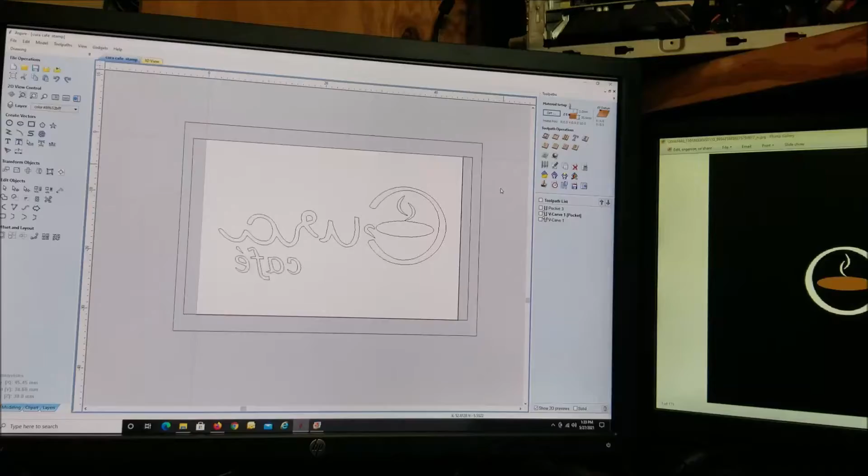My wife wants me to make this stamp for her pottery business. So I'm going to take you guys along for the ride, show the setup and everything.

So here we've just basically got our vector lines. So this is the stamp. And I have to reverse it, so when she turns it over and stamps it into the clay, it creates this.

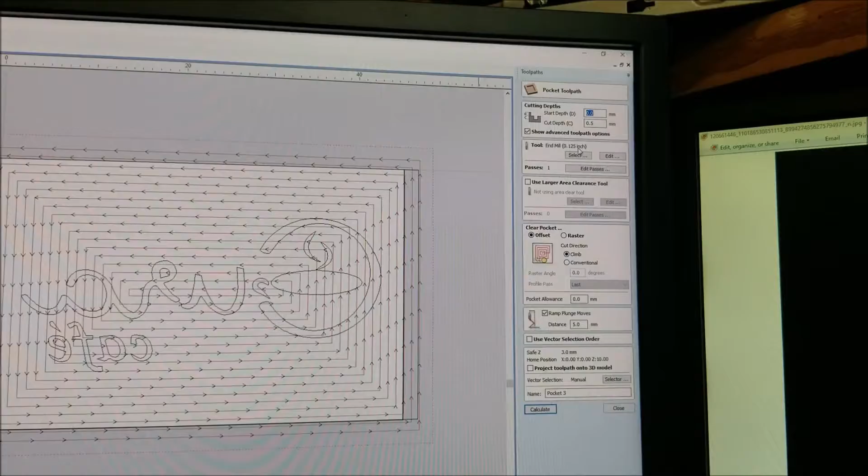So here's what I've got. I've got my material set up to the size of my block, and I've got 3 tool paths over here. First tool path is nothing more than a surfacing, a pocket tool path, and if you see, I've got it going outside of my material boundaries. So that's just going to deck off the surface. I'm using a 1/8 inch end mill, starting at Z0, the top of the material, and it's going to cut 1/2 millimeter down and surface this.

Now if we look at the V-Carve tool path, let's go ahead and turn this off. Here I'm using 2 end mills. I'm using a flat 1/8 inch end mill, the same one as before, to go through and cut out most of this material I don't need. And then I am using a 15-degree tapered end mill with a 0.1 millimeter ball on the end, and that is going to come in and do all of the rest of the stuff here.

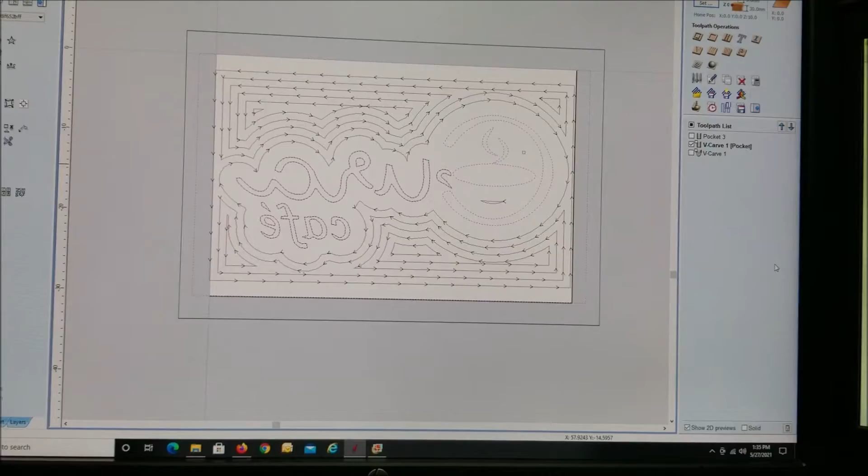So that's what the ball end mill is going to do. Now all of this out here is just wasted time because there's no material, but that's just the way the software creates the tool path, so we have to let it do it.

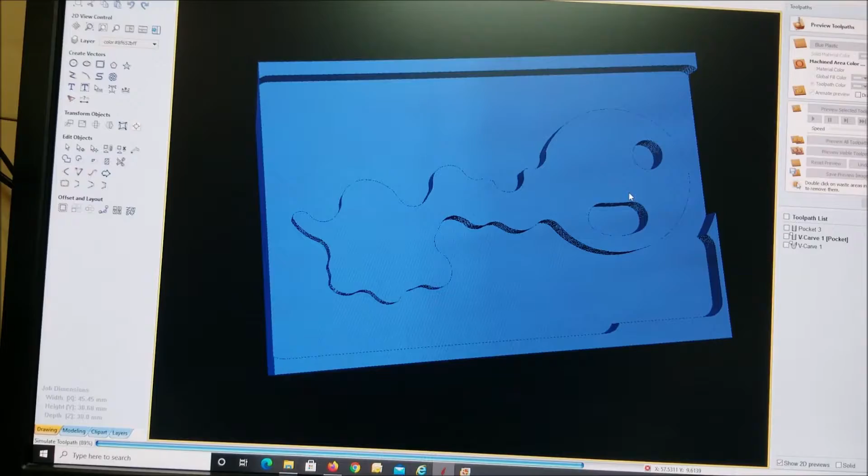And if we go in and we do a simulate all tool paths, there you can see it decking off the 1/2 millimeter on the top surface. Now it's going to come in and remove most of the unwanted material for the V-Carve. And there's the V-Carve, and that's what we should end up with.

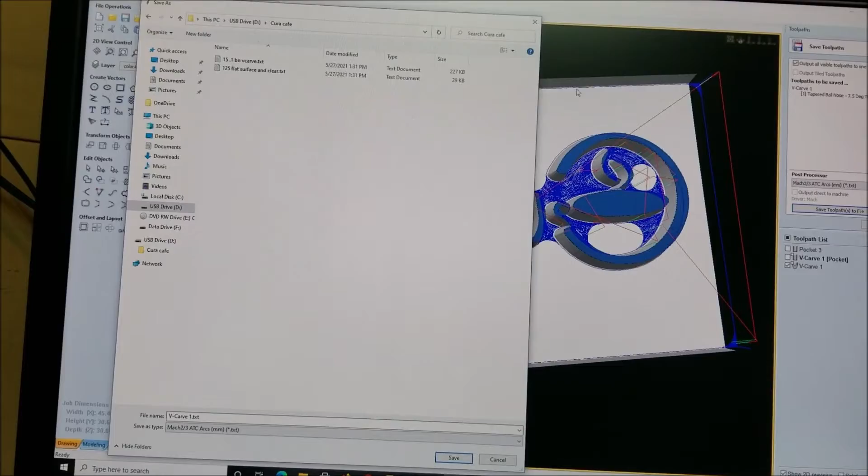So I've already created all my tool paths. Now I just need to copy them over to a memory stick, and the way I do it, since I've already saved these, save to file, and it brings up all the stamps I've done. This is the Cura cafe one. I am going to copy this folder over to my memory stick. And then I'm going to come in here, and here's my 2 tool paths. I saved the decking and the roughing of the V-Carve, since it's using the same tool, into 1 tool path.

So now we're going to grab our stick and head over to the machine.

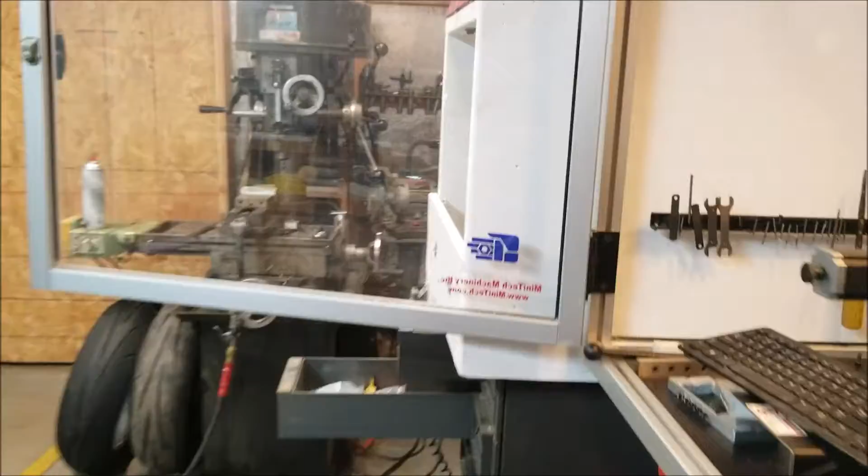So here we are sitting at the machine. I've just thrown my vise up. I've got a ground parallel in the jaws. I've got an indicator. This is one little modification I did to the machine that is worth its weight in gold. It's just a round piece about 2 inches in diameter, hole drilled through the middle, and I drilled and tapped the hole into the squeeze clamp for the spindle, just so this spud stays on here at all times. And then I can just take a regular indicator holder for Bridgeports, you can get them off of Amazon for 10 bucks. And then I've got my indicator down here.

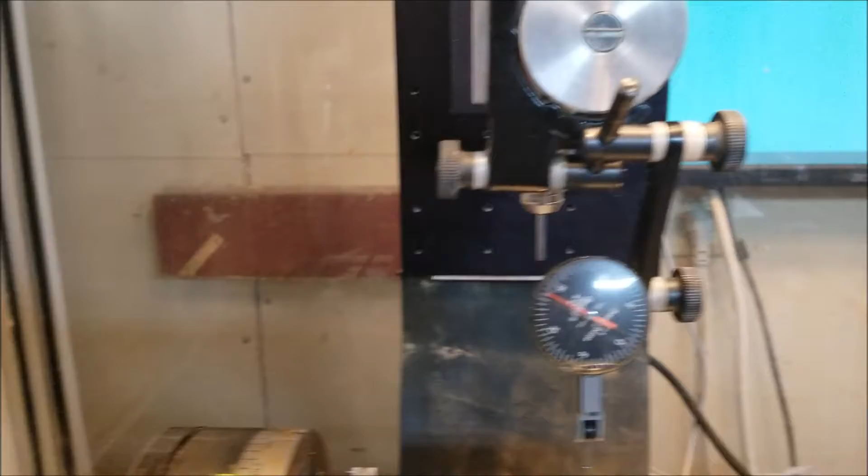So I need to fire up Mach. Reset. Very first thing we always do is home all.

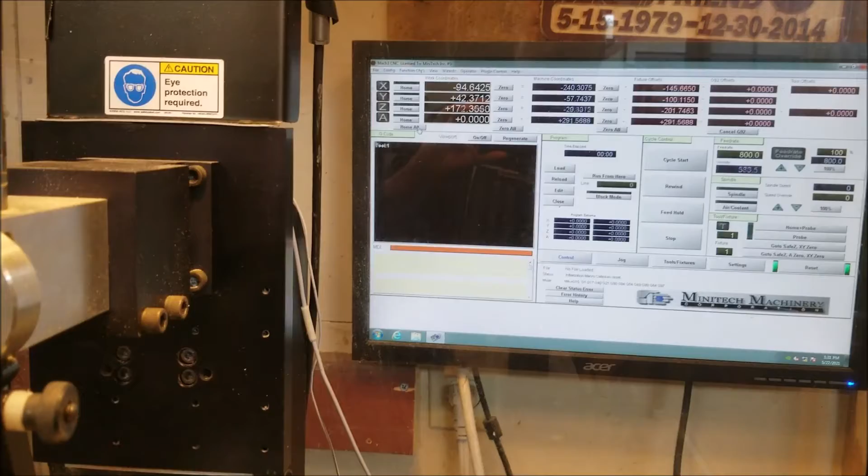And I'm holding my phone while I'm doing this, so it's going to be quite interesting. I might just have to explain some stuff when I go to set up my zeros.

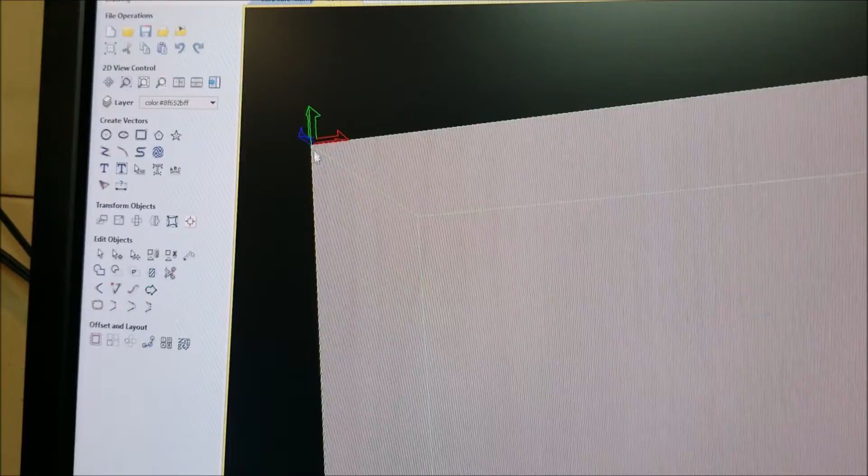So I did not mention, if we go into the setup, we can see that my 0 point, or my datum point, is the top left corner, or the back left corner, top of the material for Z. So it all happens right there. If I go in and I turn off my tool paths, you can see that my 0 points are right there at the top of the material.

Alright, so we are homed. Now we have to indicate the vise in just to make sure that it's straight. As you can see now, it flops all over the place.

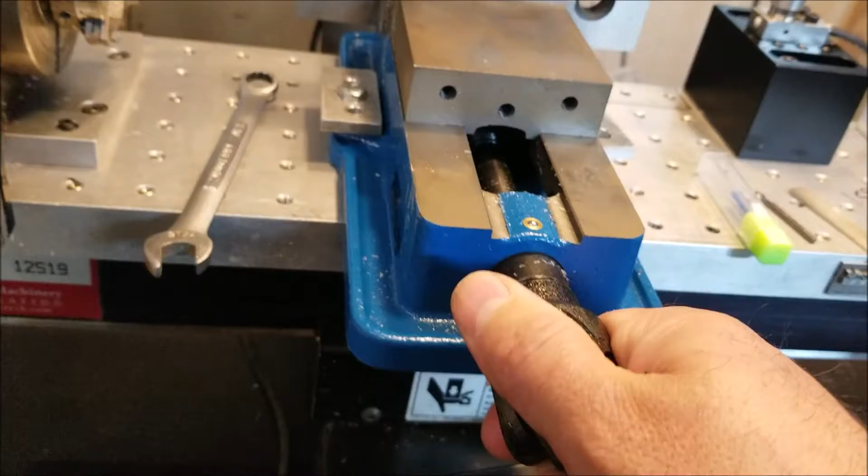So I just want the ball to be somewhat snug. Okay, it is. So I'm going to take it, touch the ball on here, and run it back and forth, tapping on this to get it straight. Since it's really loose, I'm going to tighten down this one side just to get it snug and create a pivot point.

And we're going to come over here, put a little bit of pressure on the ball. So we see that when it rotates clockwise, it means the needle's coming towards us. So we kind of need to know that.

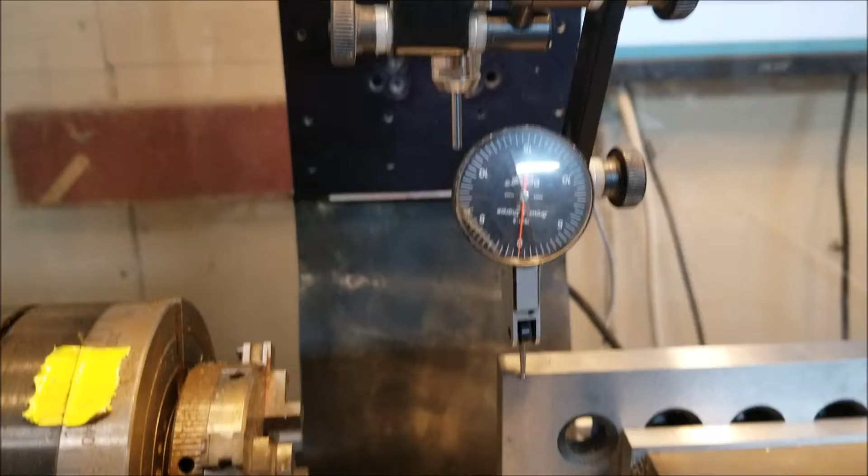And just for fun, I will somewhat zero that. Now I'm just going to jog across. So if it goes clockwise, that means this side of the material is coming towards us. If it goes counterclockwise, it's going away from us. So there we're going counterclockwise.

Over here I have a magnetic strip with all the frequently used tooling, and I've got an old screwdriver. Just tap on that - so we can see it's still going away from us, so we need to tap the other direction.

And get it close to zero. Let's go back and see how far that moved us over on this side. The reason why I'm using the parallel in here is I've only got 3-inch jaws, so I'm clamping something that's longer in the jaws for more surface area, so I get a better indication. That's all I'm doing there with that.

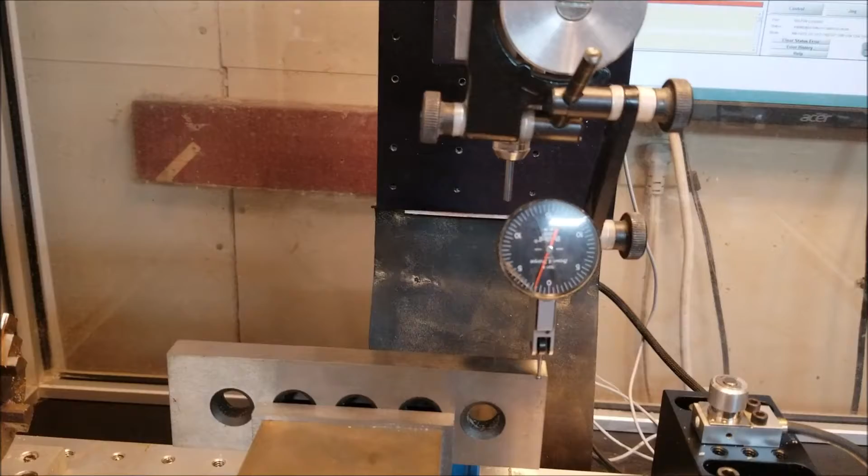So this is a half-thousandths indicator, and that is telling us I'm 1.5 thou off. So we can see that the needle's still going in the same direction, so I'm going the wrong way. So we'll start tapping on the other side.

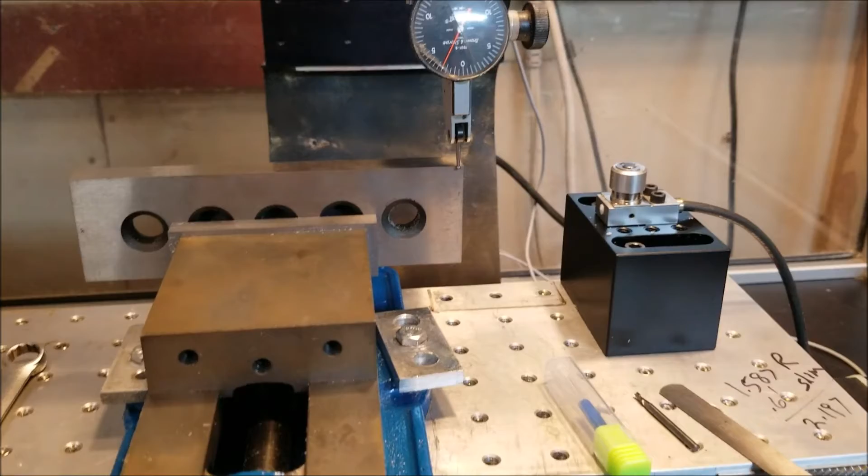And get it right there. Jog back over. For the part I'm doing, this isn't very critical, but it's always good to get in practice. So there's a half thou, and then it goes back towards zero. So I am going to leave that alone.

I'm going to find my wrench, going to snug that down. And without touching anything else, we're going to sweep back across. Still within half a thou. I ran off the edge, no big deal. Indicating is done.

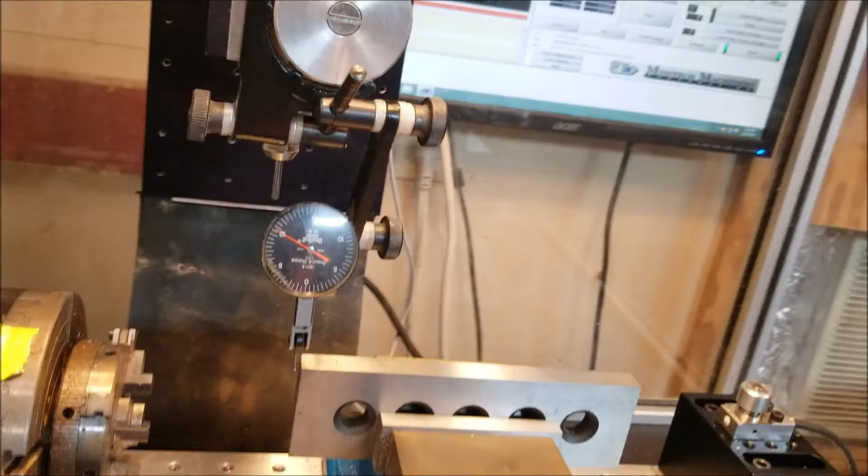We can take this off, and I just put it up here on top of my enclosure. All right, so we are done with that parallel.

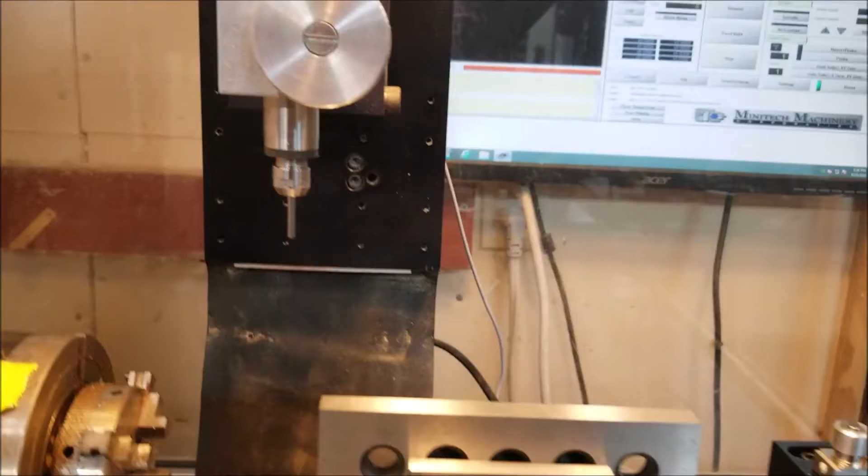So we'll take it out. Now the fun stuff happens. So I have to find that edge right there. So I can either take a tapered tool, and for this job it probably would be perfect, put that in the spindle, bring it over here and line it up right over that corner, 0, 0, and I'm good.

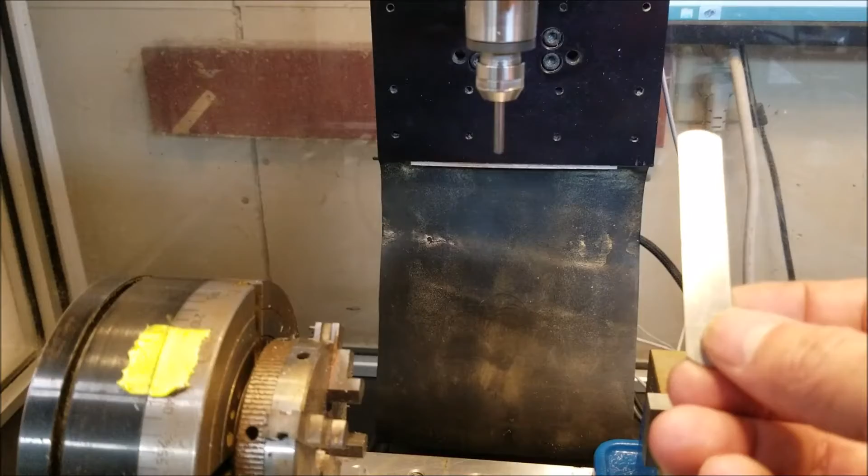But I'm going to do something a little bit more tedious, but a little better as far as tolerances and stuff goes. So I have a round 1/8 blank in the spindle, and I have a 0.61 millimeter thick feeler gauge. What I'm going to do is I'm going to do it off camera because I need two hands and I'm holding the camera phone. So I am going to put this in here, and I am going to jog this till it just touches this, to where when I can slide this, it'll actually rotate the spindle.

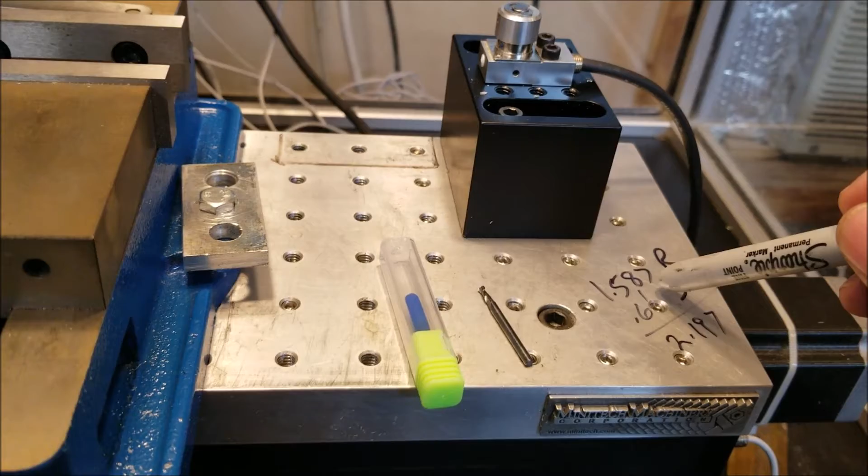What that will tell me is I am the radius, or half of the diameter of this, plus this off of that line. And I always, since I'm terrible with numbers, do the math that I need to do, and I'll take a Sharpie marker and write my numbers down here that I know I need to work with. So 1.587 is the radius of that tool. I'm going to be off that, and add those together. When I come over here and touch it and zero there, I know that I am 2.197 millimeters off of the edge, because I want this edge to be on the center line of this tool.

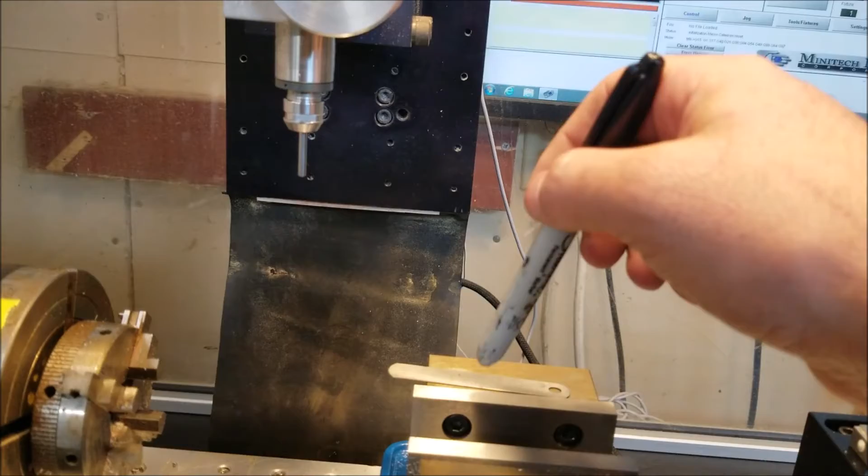So I will touch off there and touch off there with this in there, make some little minor adjustments, re-zero, then I will put my material in, put my tool in, bring it down, touch the top, and set my fixture offset. We will get to that here in a second, but I am going to beat on this for a second, and I'll be right back with you.

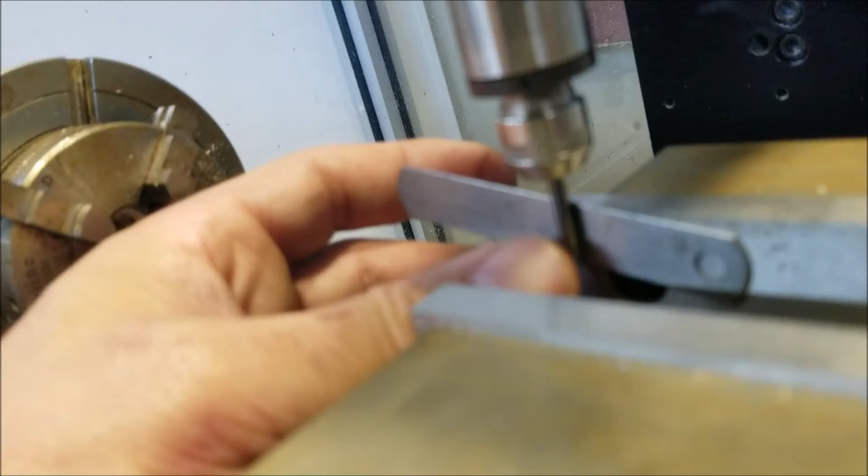Alright, so here's what I've done. You can see I've got the feeler gauge in there, and when I pull it, it slides and rotates the tool, which means I've just got very little pressure on there. So if I want this edge, which is my 0 point, I need it in the center line of this tool. So I will just zero out the y-axis, jog it straight up - and I'm in step mode, so let me go back to continuous - jog it straight up.

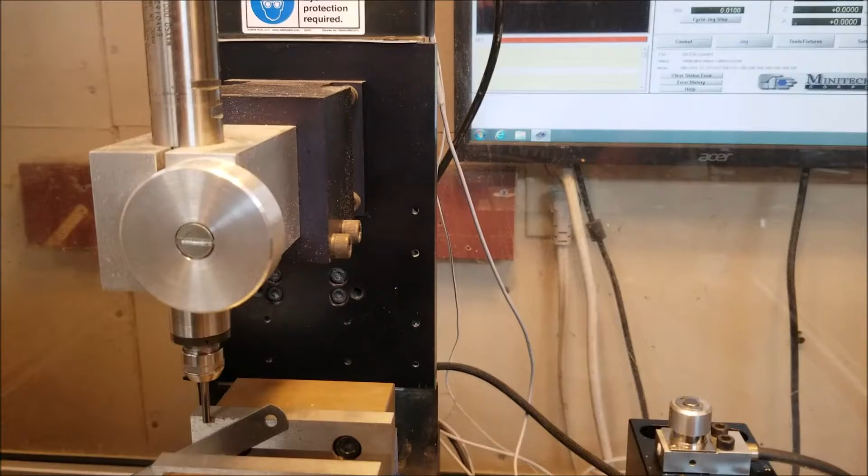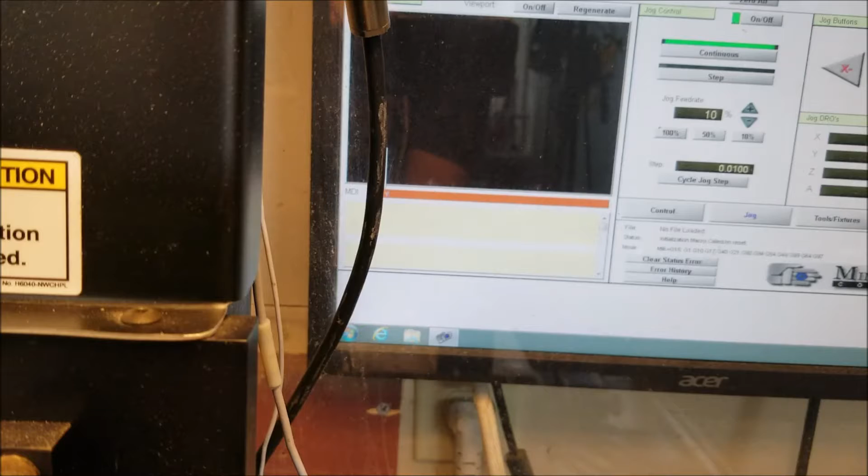And if you don't know the positive and the negative and so on and so forth, we can come up here and we can push or jog the direction I want the spindle to go. I want the spindle to go to the back, so I'm going to press the up arrow button. I'm going to watch. So that gave me a positive number there, so I can now open up the MDI line and tell it to G0, Y, and I look over on my table where I wrote the numbers down.

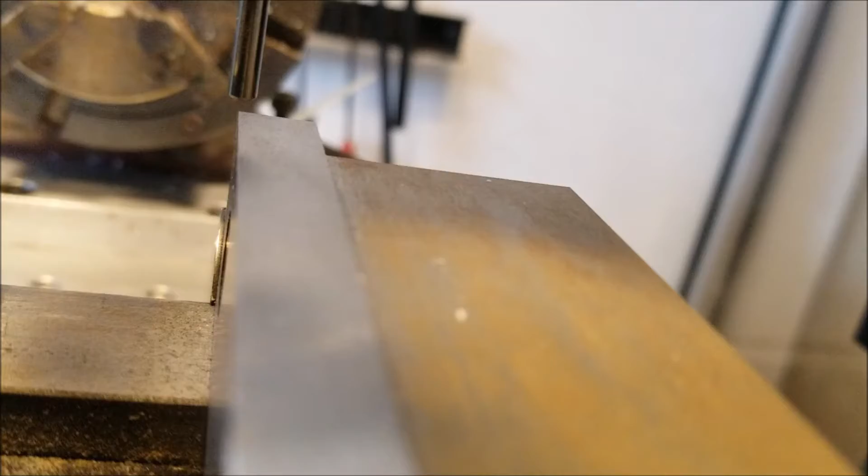So we need 2.197. So you can see I've got the code typed in there. Do a really quick check to make sure that when it moves, nothing crashes. Press enter. So now if we look, and you gotta get the perspective just right, I understand that, I am now centered over that edge. So now I will come up here and I will re-zero Y.

And I am going to do the exact same, except this time I am going to come off of this edge right here. Then when I put my material in, what I will do is I will put a straight edge across there and butt my material up against that. So let me get working on that. Hopefully this video isn't long and boring.

So here I am on the X. We can see that I'm rotating this. I don't have to put a lot of pressure, but it's rotating the spindle. And now if we look really close, we can see that gap that it's left in there. So this is X. So I am going to zero X. Jog Z-axis. I'm still in step, but if I hold the shift button down, it'll override it, there we go. So now we need to know, is that a positive or a negative direction?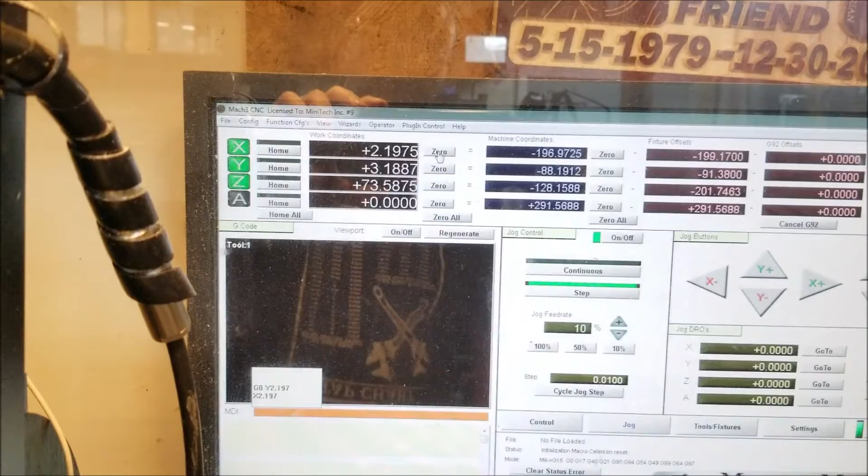So now if I tell it to G0, X0, Y0, I am now perfectly centered over that corner. So now we have to do the Z, but I have to load material in first so I can get that. So what I'm going to do is I'm going to put the camera down, I'm going to raise this up, I'm going to put my cutting tool in here, and I'm going to put my material in.

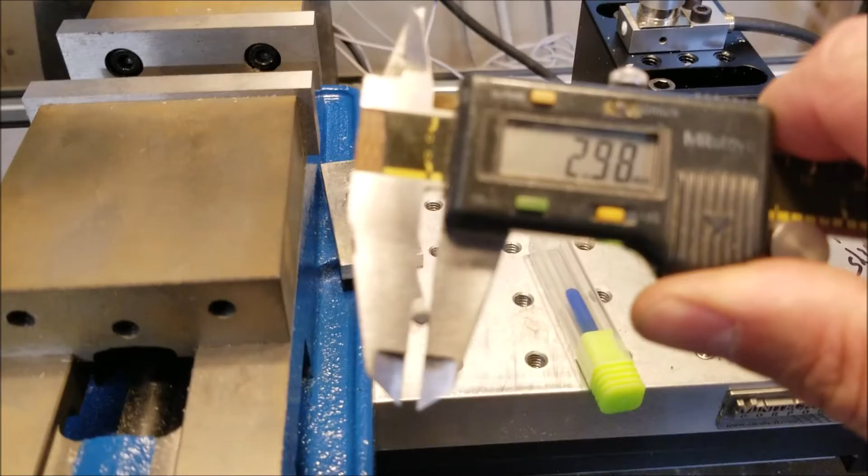Something I just ran into, I think it's worth mentioning. So there's the broken tool that was in there that I just used as the bar. Okay, and here's the end mill that I grabbed. Pretty close. But if I stick this up in my collet, very loose. Whereas if I stick this up in my collet, I can feel the drag from the fingers. So I grabbed my calipers, and just bear with me while I do this. That's a 3mm tool. And you're probably going, yeah, so? Well, my other one was 1/8 inch, which is 3.175mm.

So could I probably get away with sticking this tool in a 3.175mm collet, tightening it down? Yes, but you run the risk of doing what we refer to as springing the collet. It means you're compressing it too far. So I have one of two options. I either grab a collet that would fit this shank, and then I have to go and rewrite my tool path because it was written for a 3.175mm flat end mill, or we put this back over here on the bar and we grab us a right size tool. So now when I stick that in there, it goes in there really tight. Let me get that finished. I just thought it was worth mentioning.

One other thing worth mentioning is I got this up here in the collet, and I tightened it all the way down, and then I thought about this, so I thought I'd show it. It's hard to do one-handed, but I've got the collet nut loose. Or I thought I did.

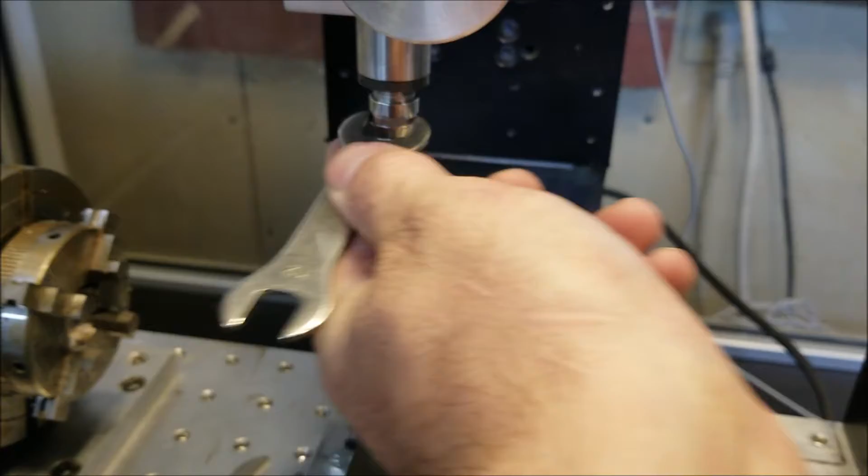Hold on one second. See if I can bring this down so you might even see what I'm doing.

So the way this works, and this is mainly for new people, a lot of people know this, but you can see that the nut's loose. I tightened it up, nice firm pressure, then I broke it loose. I can spin it, but the tool will not, well, yeah, I can pull it out, but it's hard to pull it out and push it back in. So on these collets, you spin that nut till it stops spinning again, then you have to put the wrench on it and pop it loose.

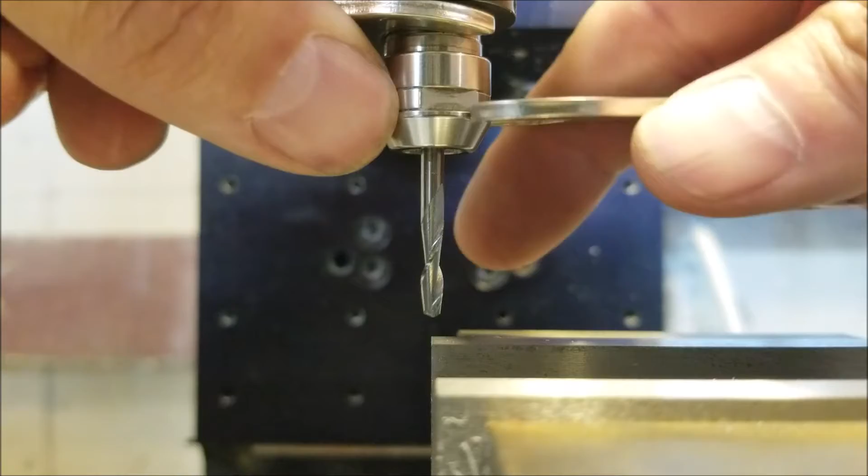One of these days I'll actually get some kind of equipment to do this. So what I was trying to get to is when you tighten one up, and then you break it loose, and then you unscrew it till it tightens back up, you still can't pull the tool out. So you have to put the wrenches back on it, pop it loose again to get it to pull the collet out of the actual taper of the spindle. All right, so there we have that. And let me go ahead and jog the Z-axis up.

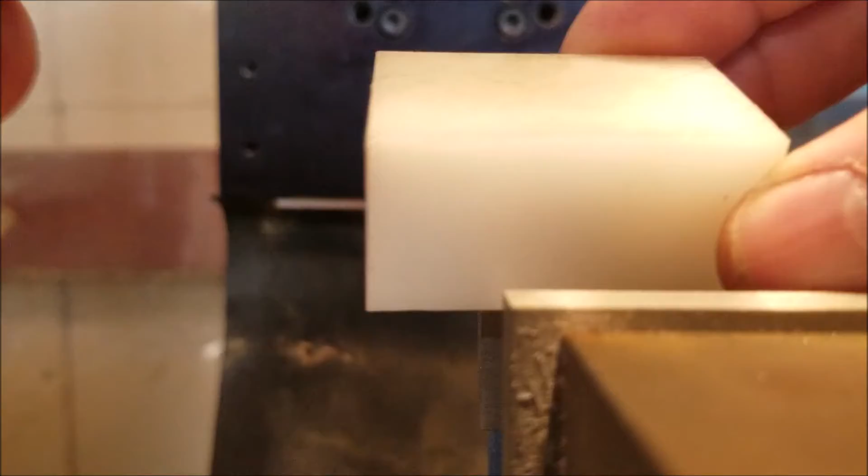So here's the piece of material that I'm going to use for this project. It is saw cut on almost every side, so it's not square by any means. But I also can't just chunk it in my vise and go to town on it, because it sits lower than my vise jaws. So I can't machine off this top surface without running into my vise jaws. So that's where parallels come in. And I don't really have any for this vise, but I've got some big ones.

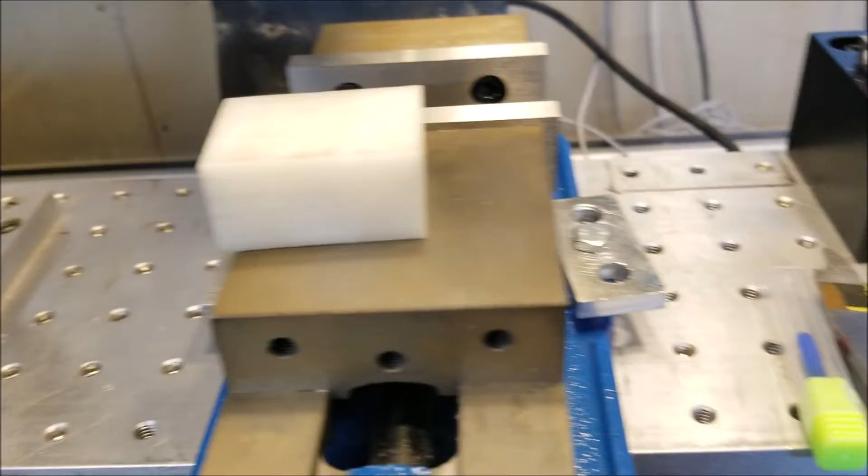And what I like to do is take this guy, run your hand around all the surfaces down here, make sure there's no dirt, dust, swarf, chips. And I am going to lay this guy down. Then I'm going to put this guy right on top of that. Now I'm going to take this guy, run it across these two surfaces, because that's the one I indicated on. I'm going to push it over, down, and I'm going to stop the camera, grab my vise handle, and crank that knob.

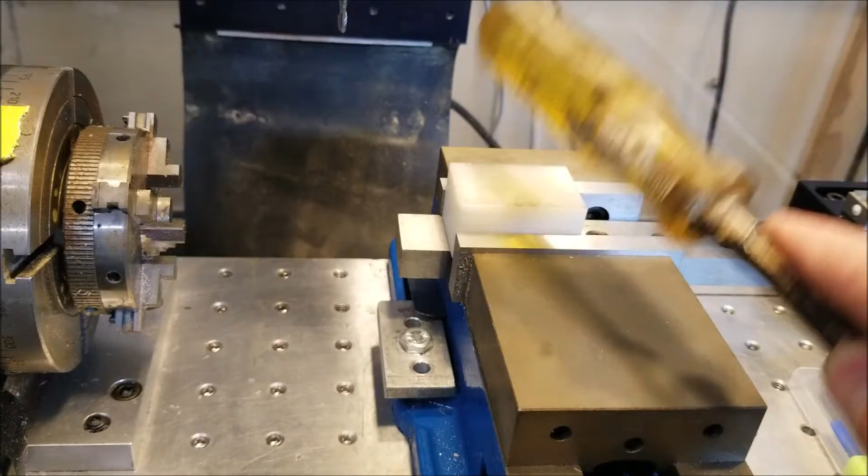Now, because my material is saw cut and it's not square, things lift and move, and it's not going to be a problem for this part. But for example, if we look right down, you can see where it bows up off of the parallel, but my parallel's in here tight. I can wiggle it and probably get it to pull out, but what we'll do is let's jog this out of the way. My trusty hammer. As Adam Savage says, anything's a hammer. Tap it down tight, and we're there.

And that will work. So now we have to find the top surface. And I'm sure it's wavy and not square either. But what I'm going to do is hit about the middle. And we are going to take our... technical difficulties. I lost my shim. Be right back. Couldn't find my shim because when I did that, it fell down over here. So we know that this shim is 0.61 millimeters thick. So if I stick that on there,

and it went away from me too much. Get about the center, and I'm gonna go cycle jog step to 0.1 millimeters. We're gonna step down. What I'm looking for is drag on that. So I saw it move. That's actually pretty damn close.

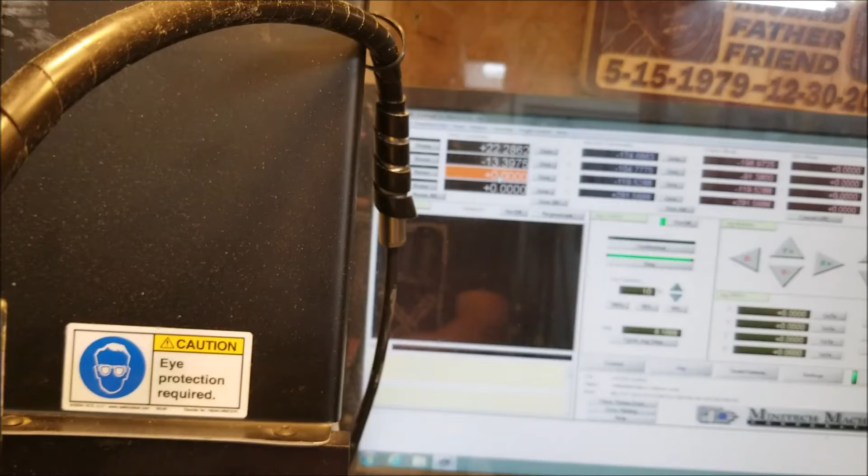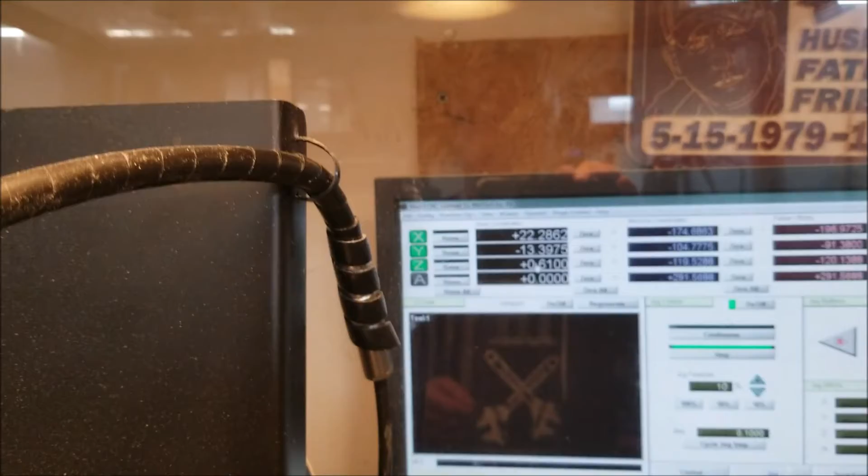So knowing that, if this is touching the top surface, and this is a known thickness, and this is touching this, then we can do it one of two ways. We can come up here, zero Z, take the shim out, tell Z to go negative 0.61 millimeters, and then re-zero Z again. Or we can just come up here and tell it that it is at a positive number because it's off the top surface, 0.61, which was the thickness of our shim. We told it it's now 0.61 millimeters above the top surface.

Now I need to set a fixture offset, so I'm going to tell it G0 X0 Y0 in the MDI line. So now we're over that corner. Now I'm going to tell it G0 Z0.

So we are 0, 0, 0. Tool is sitting over the edge, over that corner. Material's not straight, so it's not exactly perfect, but for this it's going to be fine. So if this is our work coordinates 0, 0, 0, I need to set this as a fixture so I can refine the tool length using the tool probe.

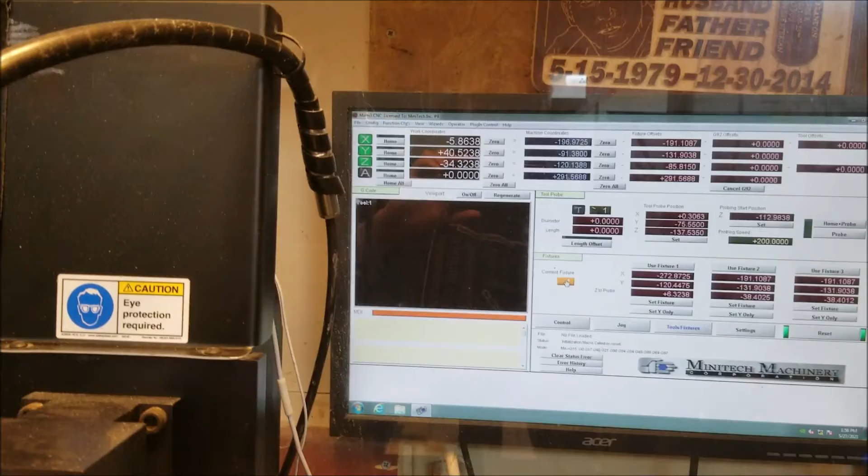So we're going to go to Tools and Fixtures, and I am going to use Fixture 2. Now when I told it that I was going to use Fixture 2 right here, all my numbers changed because it was originally using Fixture 1. So if I come over here to Fixture 2 and I just zero all, I'm back to where I started. Now I'm going to set fixture. It's going to need a probe.

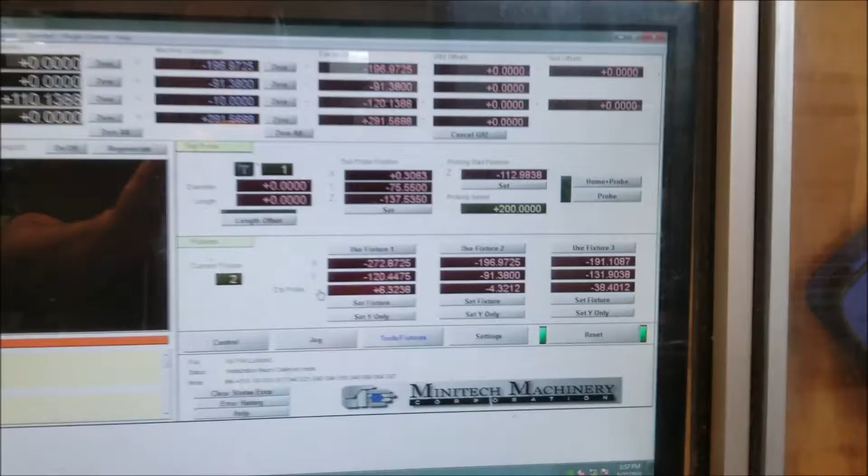This is pretty boring, so I'm just going to go ahead and pause. Okay, it's done probing and it set my fixture, which is these numbers here. We've got our first tool in, so now we need G-code. Slap this down here into my dusty computer.

Cura Cafe, cut, come over here, load G-code. I've got a folder in here. So the way I do it is right off the C drive I create a G-code folder. Then I put subfolders in there for the projects that I'm doing. So here's Chris's stamps. I'm just going to right click anywhere, paste that. Show all files. We don't need this.

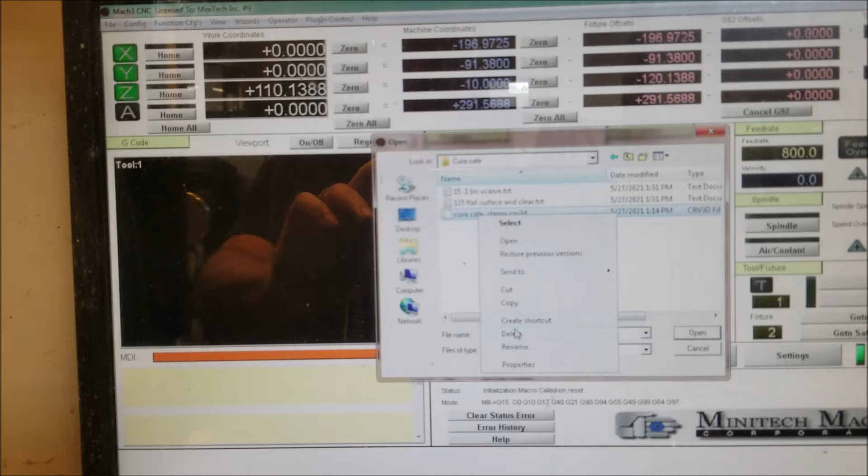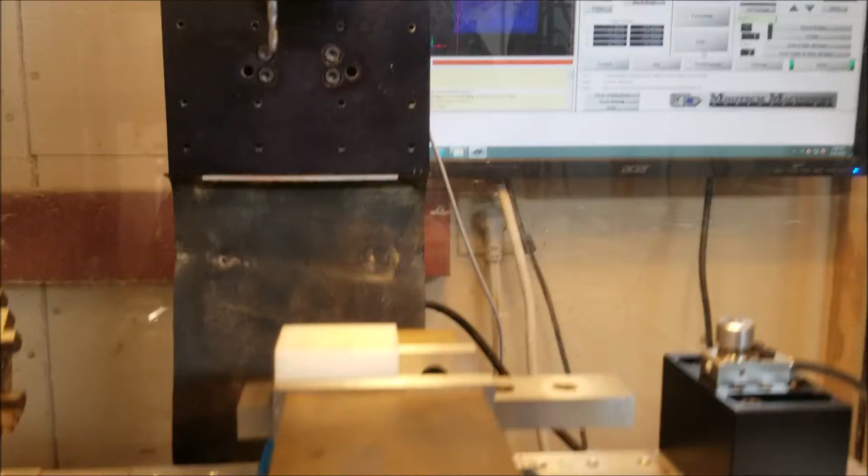So there's the 125 flat surface and clear. That's the tool that I want. All right, so now we can see that we have the magenta crosshairs, which is the center line of the tool, and we can see what this is going to do. So now I'm going to, just for argument's sake, get that down here.

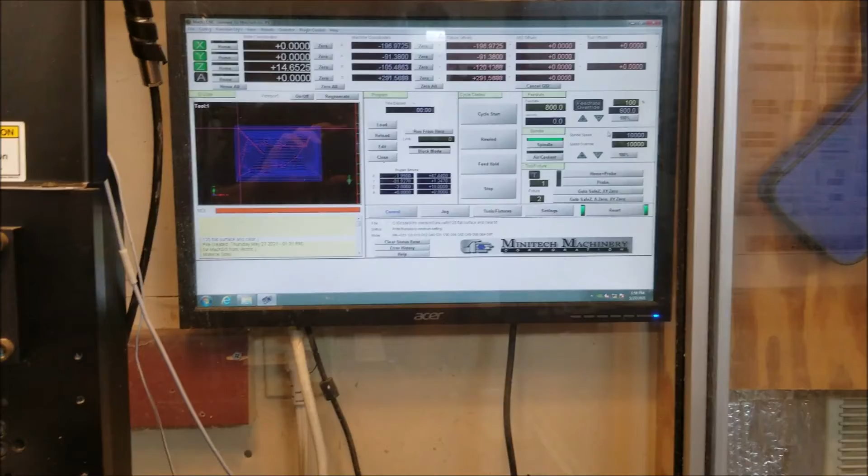Give me some RPMs on the spindle. I set it for 10,000. If we look in the code for this tool, it's gonna go to 12 thou. All right, so now we grab everything that we don't want to get all our chips all over out of the enclosure. Hang the bane of my existence back up. And click cycle start. Let's see what happens.

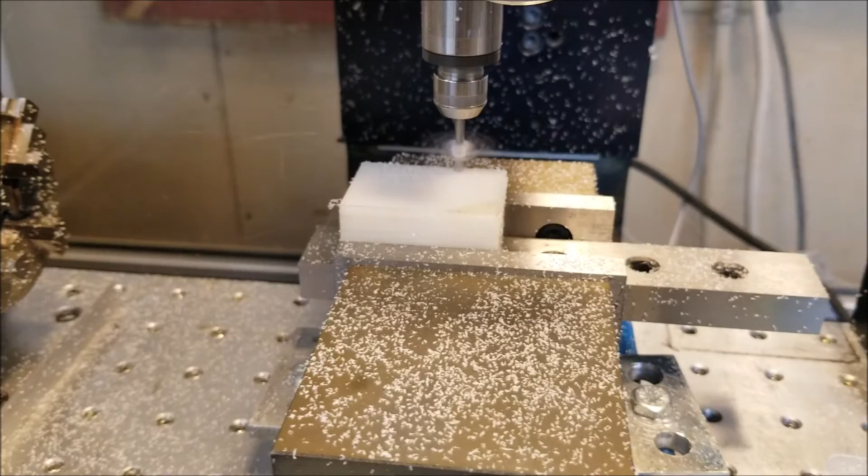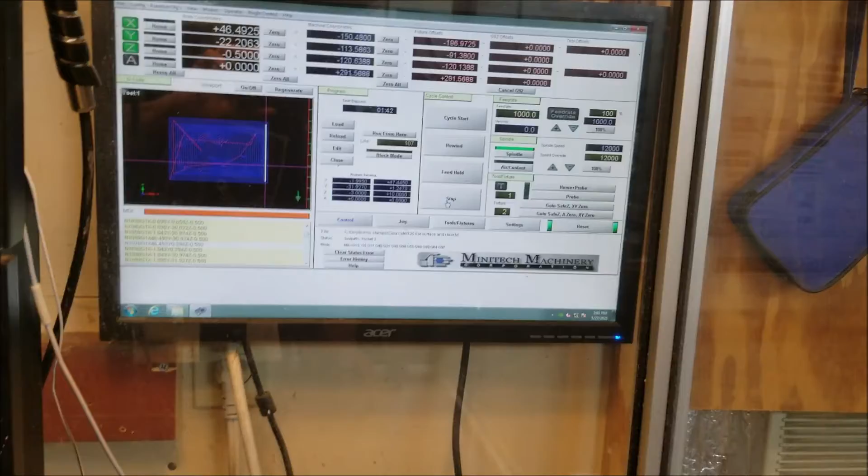We are doing the surfacing pockets. Alright, we can see where it's not cleaning up right here on this corner. So I'm going to feed hold. Alright, the machine stopped, so I'm going to click stop. You never just want to go stop because there's a buffer running. You feed hold, let it finish running out the buffer. Stop. Now I'm going to rewind that tool path.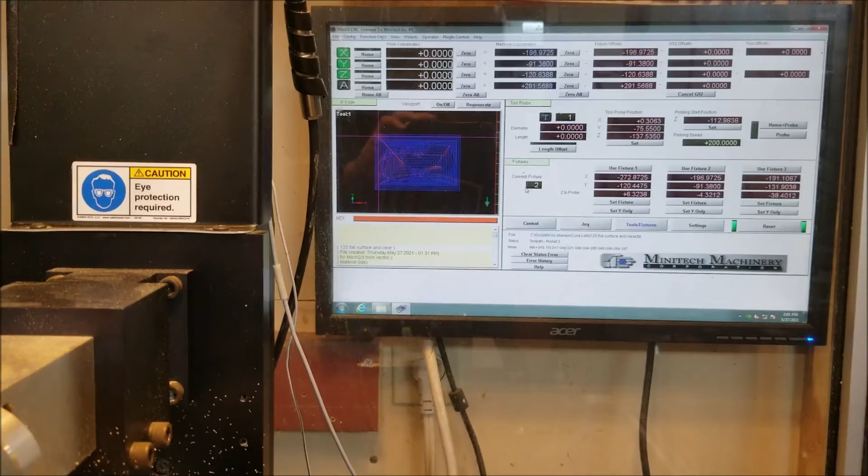And what I'm going to do is I am simply going to come over here somewhere. I'm going to type in G0 Z-0.5 because that's our deck height that we cut it down to. Now I'm going to re-zero. Okay, I'm going to bring the Z up off the top surface a little bit. Send it to X and Y 0 again. Now I'm going to send it to Z0 and reset the fixture offset. We're using fixture offset 2. Set fixture. Yes. Obviously this is going to be boring, so I'll bring you back in a second.

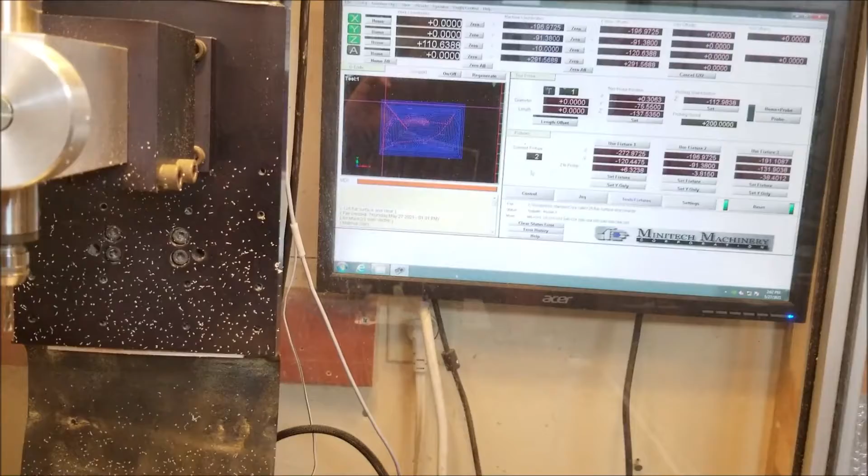Alright, it just got done probing. I got a new value of my Z because of the Z0 difference that we made it go down. And I am just going to simply rerun this code. So we're going to click rewind, make sure it's all the way at the top, cycle start.

And this is why I made that bounding box bigger than my material. Otherwise it would have been stuck and I would have had stuff in all four corners. So right now it's just cutting air, not a big deal. Now it's going to start making some noise. You see why I backed down the feed rate override?

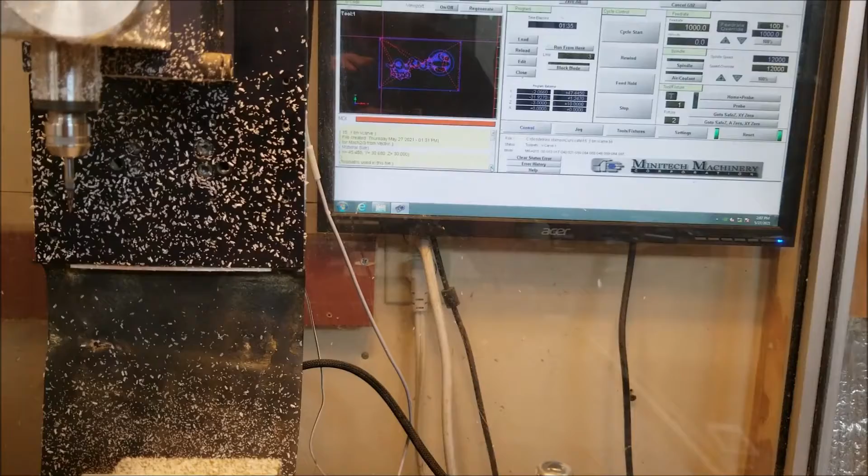Come over here, make sure there's nothing on the tool probe. I'm probably going to end up breaking this. I forgot that it's a profile tool, not a tapered ball end mill. Alright, since I don't know what it's going to do, we're going to take a look at the G-code. It's going to go at 12,000 RPM, feed rate of 1000, so we're probably going to override that and slow it down. So, cycle start.

Feed rate override. So this is wasted cut because of what it does. And we're just going to let this go. I'll bring you back when we have a result, one way or another. 10 minutes, 42 seconds later, we have a result. Don't know what it is yet. The tool didn't break.

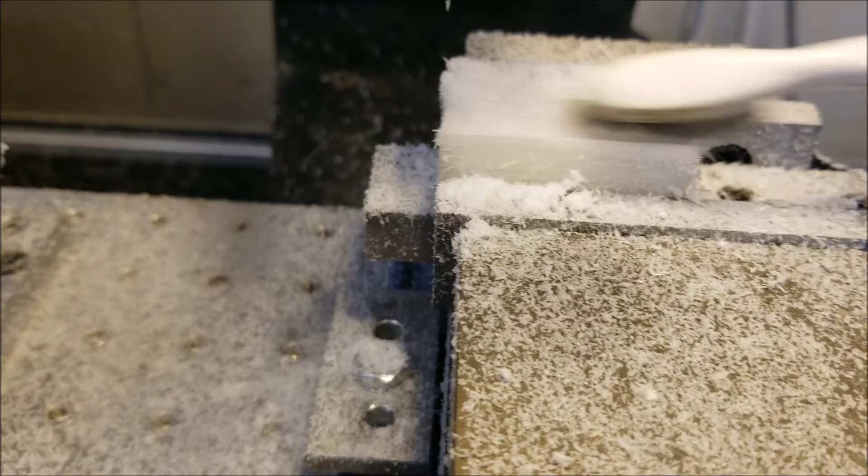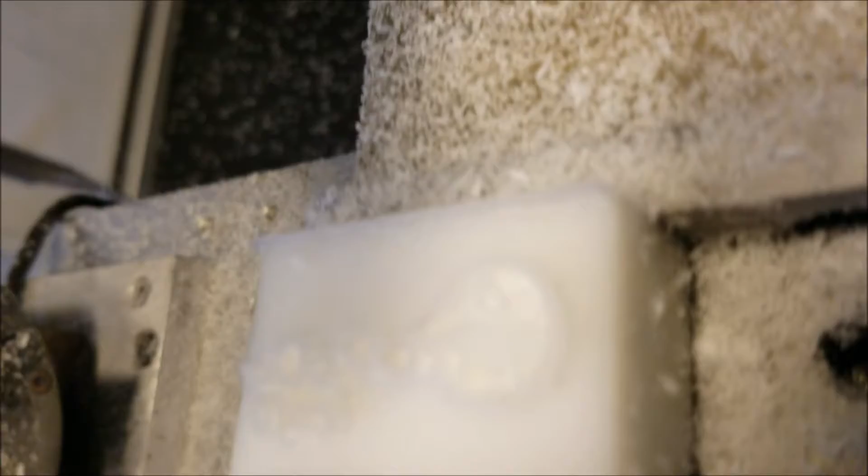Take a toothbrush and clean this off a bit. I think we have a good part. What I am gonna do, I can see some areas that are bad. That's gonna suck. White on white is obviously hard to see. What I'm looking at are these little lines right here, which are obviously not coming through. But if we come back to our CAD, for some reason it's got two lines in here, which is not that.

So let's go back and check our preview. Yeah, sorry about that. Y'all have no idea what I'm talking about.

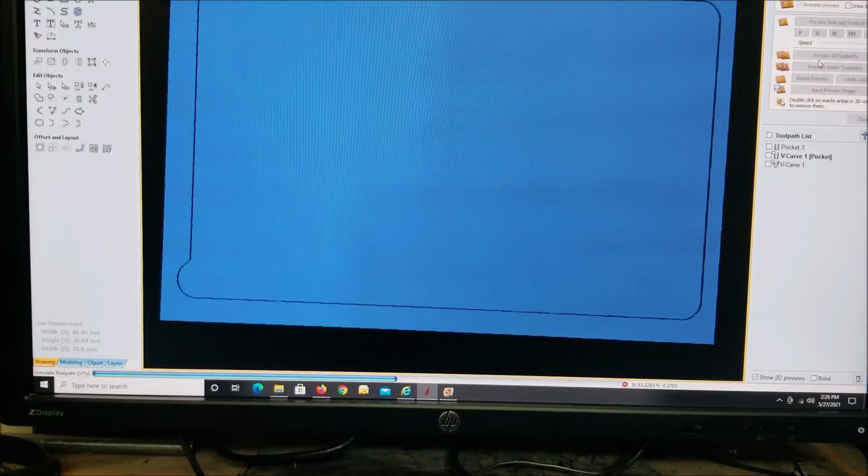And if anybody's wondering, I'm using Vectric Aspire for this. So in my part, it looks like I'm seeing two lines right here, but I could be mistaken. What I'm looking at is a wall right there and right there. Maybe because my parameters were off on this tool a little bit. Other than that, I think we're good.

So I am just going to rewind and rerun this G-code. See what happens. I'm going to run it at 100% so it's faster. We'll let that run and see if that solves any of our issues. Yeah, so we've actually got some remnants here, and I figured out what it was from. You can see a little half moon there and a half moon there. When I set my tool up, I set the parameters up wrong because I thought it was a tapered ball end mill, which had a little bit larger diameter.

So when it does its rough pass here, it cuts this, then it thinks this material is gone, when in actuality it's still there because when I ran the finish pass, the tool was just a little bit smaller. I can probably break it out, so it's not terrible. Worst case scenario, we can rewrite the tool path, zero off of this surface again, and redo it. So I'm going to pull it out and blast it off. Autofocus sucks.

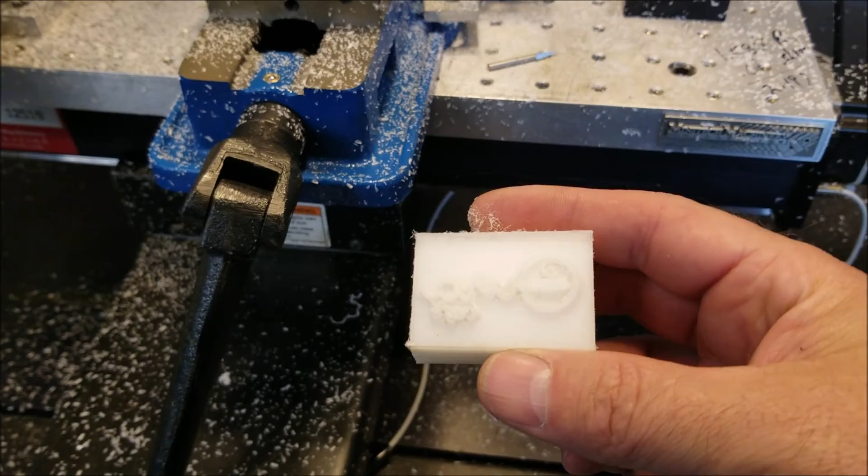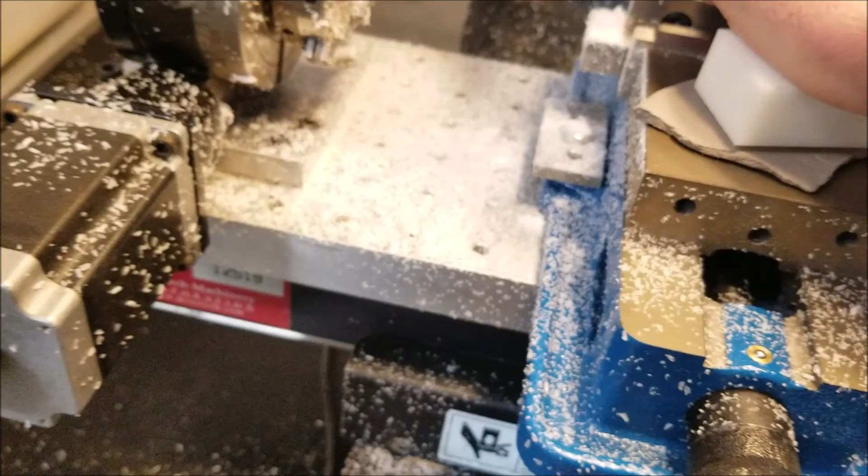So I've got a water blaster that I'm going to use to see if I can remove the rest of this swarf material. I'll be back. Did a little bit of cleanup, nothing too serious. It's hard to see, but I went and got a piece of clay. We're just going to give it a good little press and wiggle. Maybe a little too much of a wiggle.

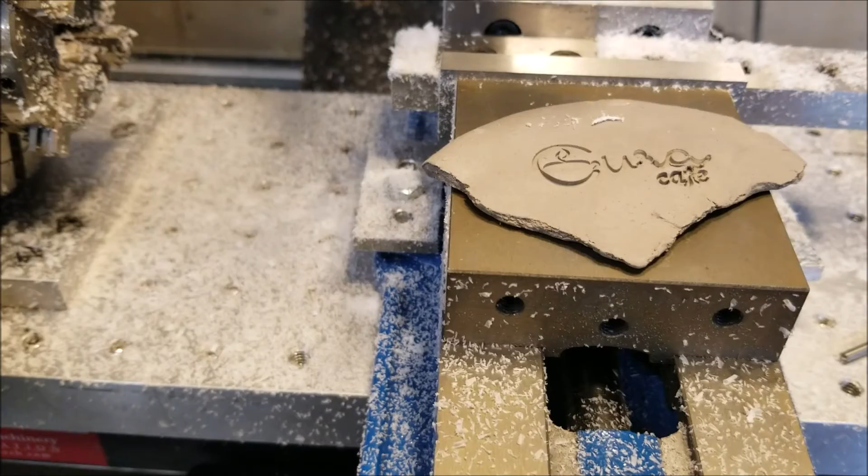I think I pressed it in there a little too hard, so let's flip that over. I'm going to put some water on this so it doesn't stick, but I need to get that clay out, and to do that, I'm going to use my little water blaster. I know you guys can't see, but I just water blasted it and it blew all that stuff out. So let's go. Normally I think she puts some sort of cooking spray on these so they don't stick.

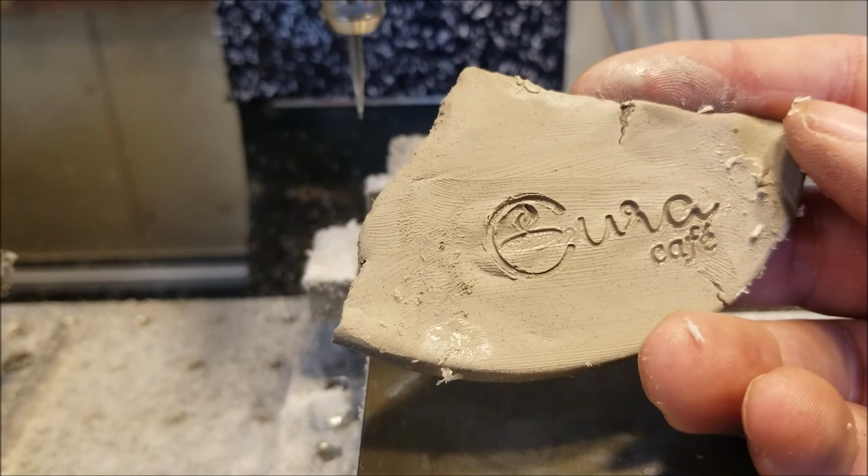I think we have a winner. Let's erase that real quick. Clay is so much fun to play with. Just from fumbling with it, and this clay's a little hard, but there you go. We have a stamp.